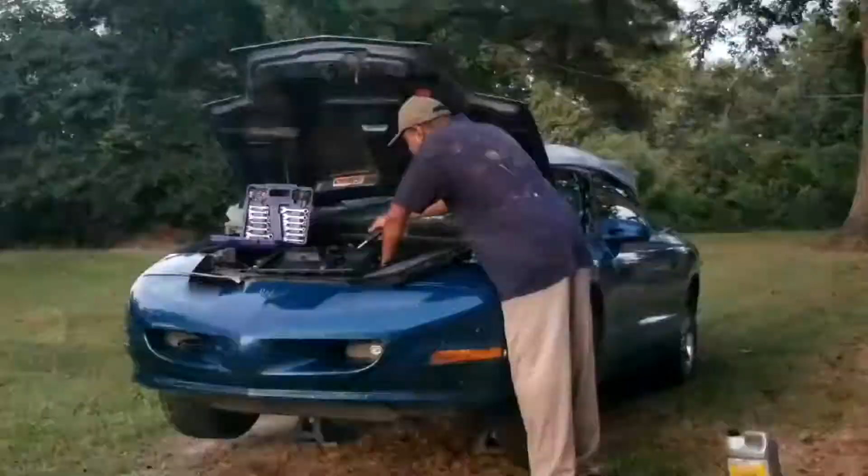Let the slow rebuild begin. Let's kick off this long process by removing the air box and the mass airflow sensor.

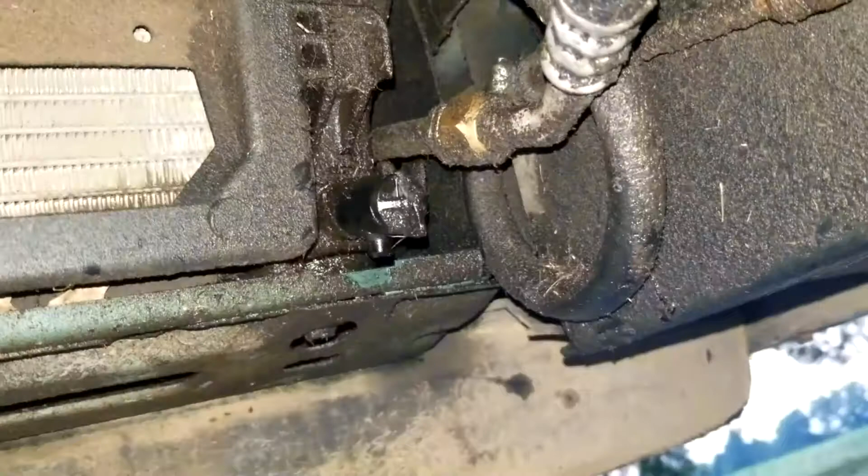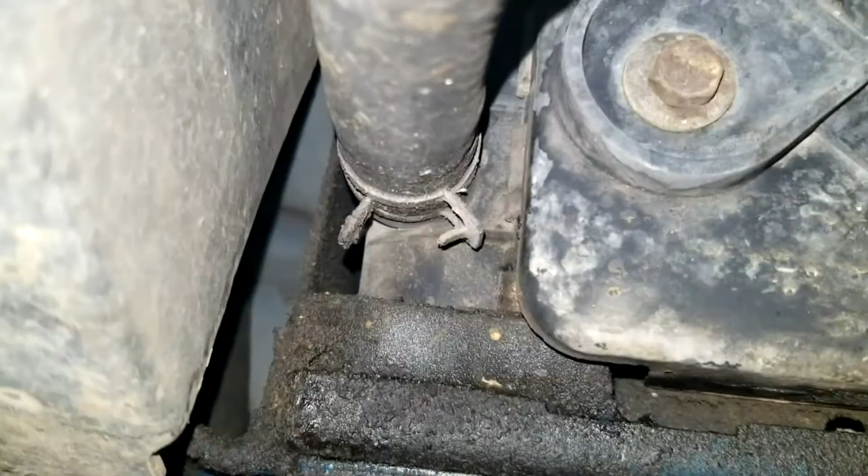Time to drain the radiator. Oh dang, it's broke. Okay, I broke this, so I'm gonna have to come over here to this side and see if I can take that hose off right here to drain this coolant out of the car.

Well, it worked. Decent amount covered. Got pretty much all the hoses off the pump. Took this off. So remove that out the way.

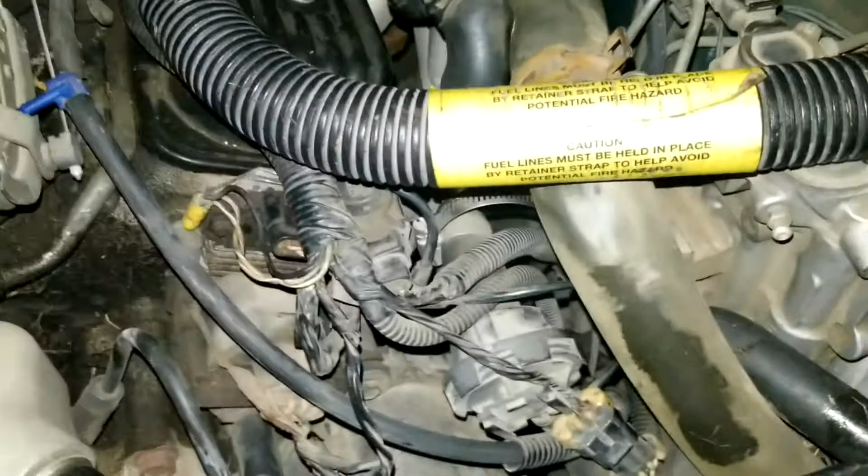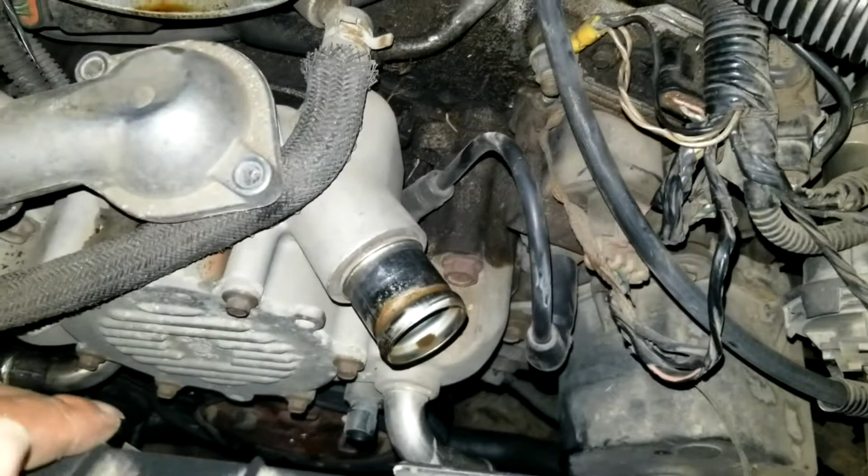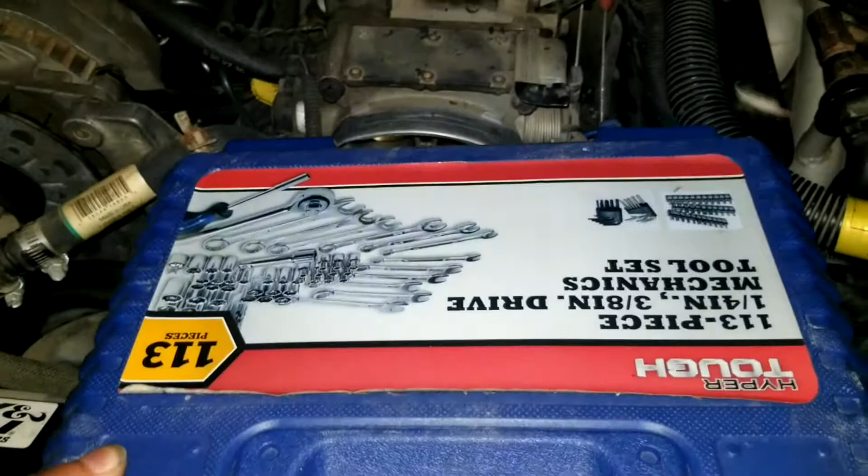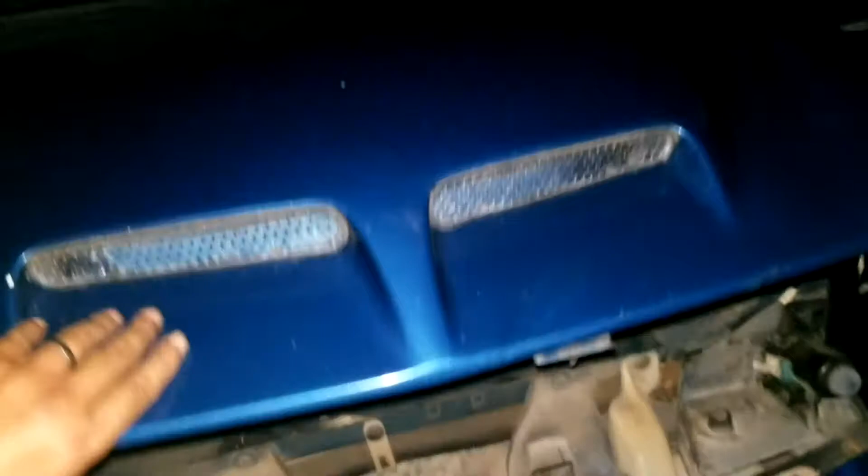So now the next thing I have to do, which adds more work to it, is I gotta take this coil off. And I think I got to remove that so I can get to one bolt out of these 6 bolts for the water pump. After that, I can knock the water pump off, and then we'll try to get the opti-spark. But for now, my day is done. Watch out for the next video to witness the disassembly of my opti-spark.

It's another morning, Saturday, September 14th. Gonna get back at it. I'm going for the coil right now. I've only taken one nut off so far, and I'm already running into problems.

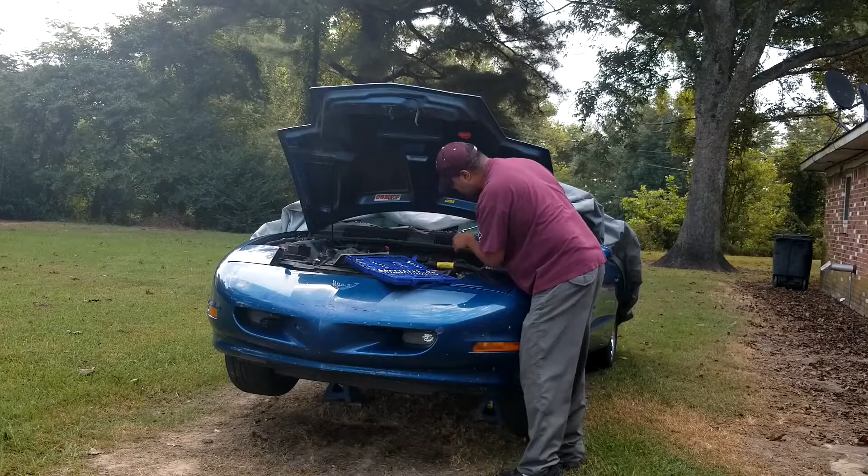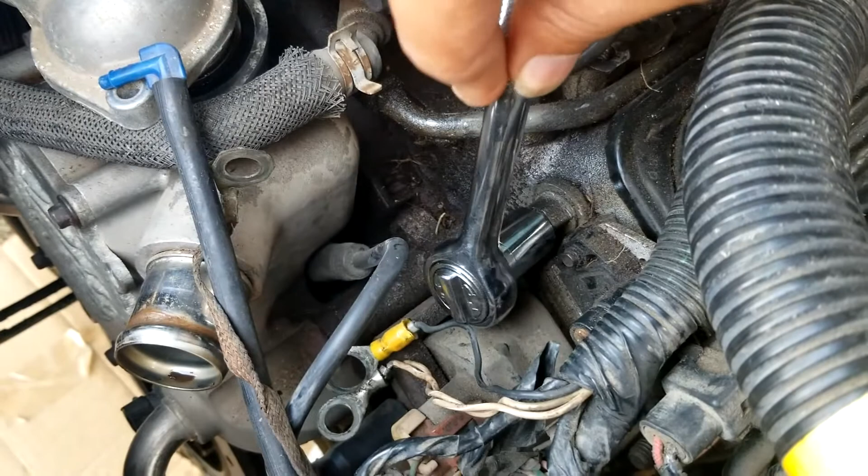Alright, the problem that I was running into first is that this socket is too short. I'm trying to put it on this bolt, it won't reach the bolt. So I had to go buy this long socket. It's just one, so I shouldn't have any problem getting it in and getting it off. So let's get to work.

With a touch of brute strength, I was able to remove the ignition coil. Put it on the lab coat again. I'm trying to operate. Remember how clean the lab coat is now.

Alright, just to show you what I'm working with. We got 2 bolts on top, 1 bolt on the bottom. So you got a bolt here, right here, and then one up under the bottom, which is easy to get to if you have your car on jacks. So let's go ahead and get this taken off, and we'll be done with that, hopefully.

Alright, after removing the air injection pump, remove these 2 bolts and the pump bracket that covers the water pump stud. Let's see if I can find this. I tell you what, I see the metal one. I can't see that one under. I probably have to get up under the car and see if I can find it.

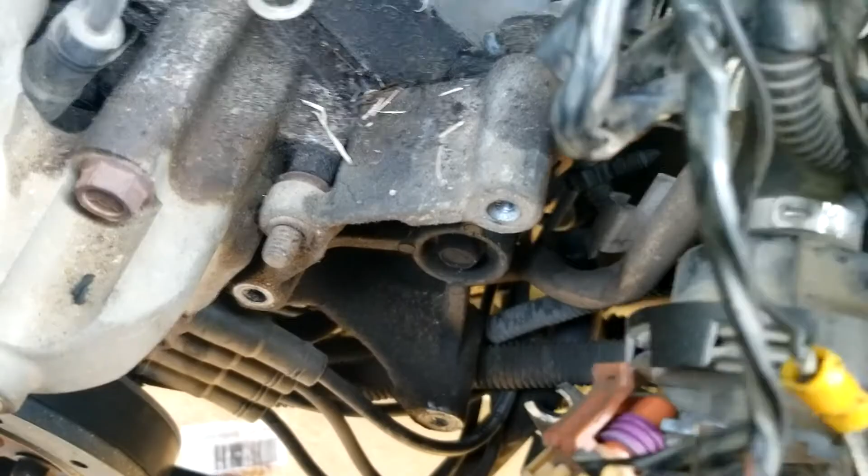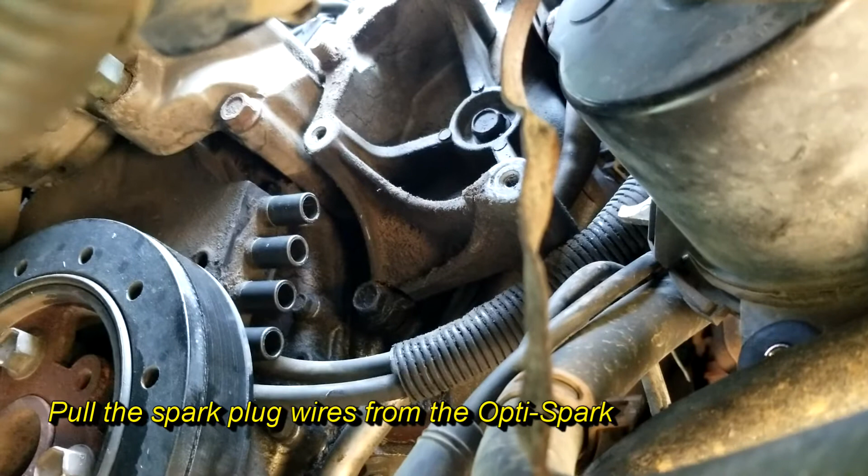Tell you what, we're working on this car rough. The second bolt, I had to pull the spark plug wires out to get to it. So you should be able to see it. It's right there. It looks like it's in between the second and the third spark plug housing.

The wires for the Opti-Spark - I already pulled the wires off. I labeled the wires, so I'm going to just go from top to bottom, 1, 2, 3, 4. And I actually put my marks on, so I know that's number 3, that's number 4, number 2, number 1. So we know 1 will go on top, 2 will go on the second one, 3 will go on the third, 4 will go on the bottom. That's how we'll do it.

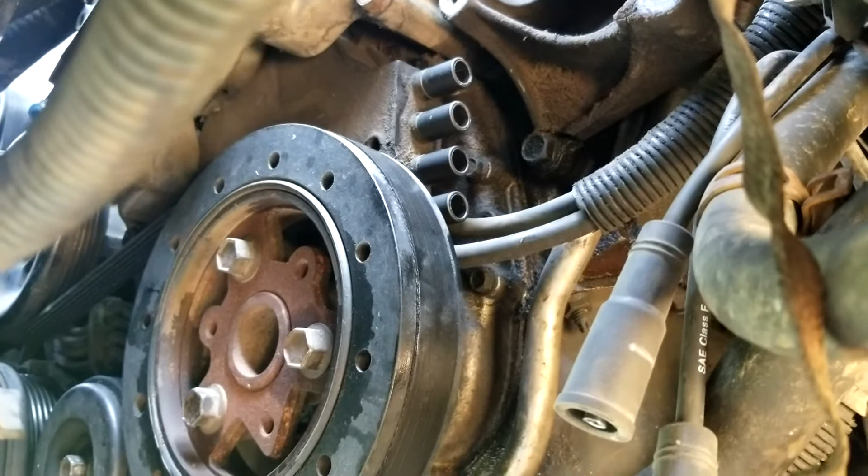And let me see if I can get this bolt off and get this bracket off, and we'll be ready to pull the pump. Unfortunately, that same bolt did not want to budge.

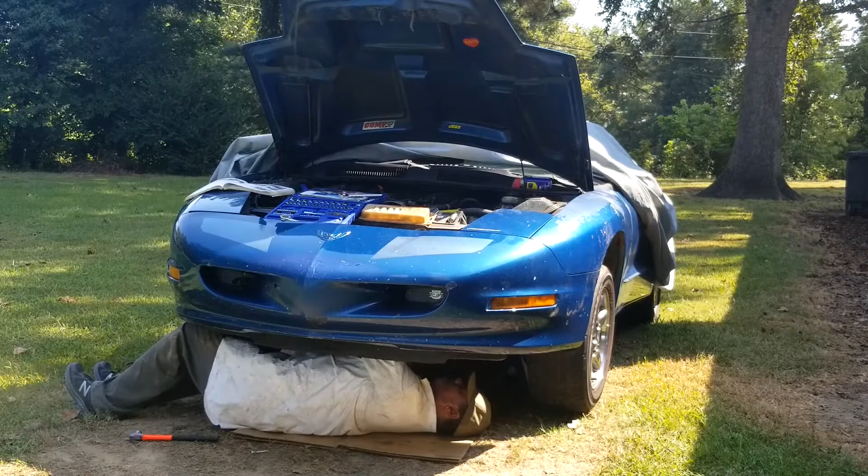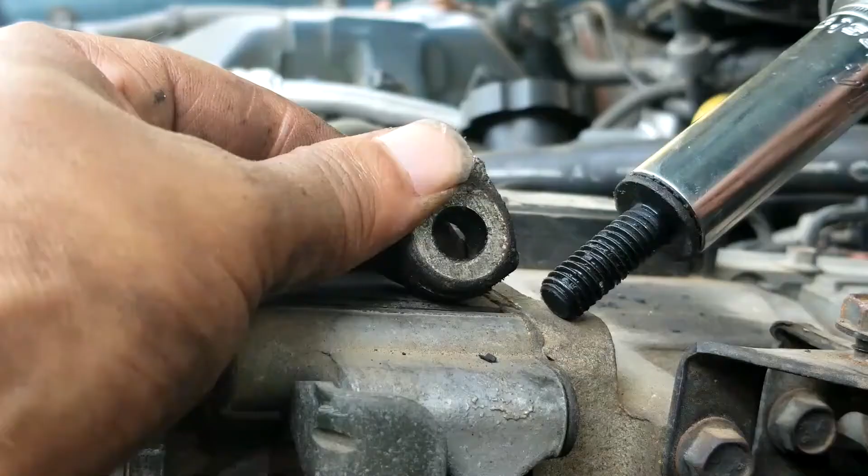Well, we got it, we finally got it loose. You got to be kidding me. I broke it. I actually broke the bracket. So y'all don't want to mess with me. There's the aftermath of what I thought was a successful removal of a bolt. I ended up breaking the bracket.

Will that make a difference? I don't know. This bracket's been broken already. It just doesn't seem like it's clean, but I don't know. But we're gonna see. All right, let's keep moving.

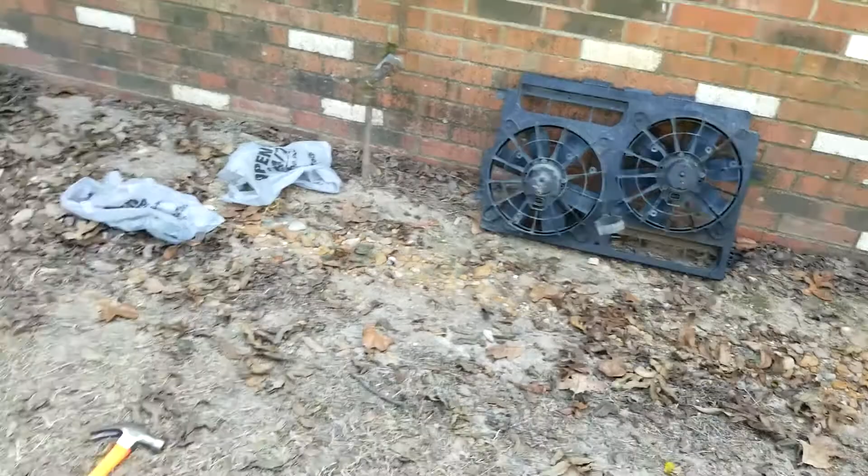Well, I ended up taking the cooling fans off too. It was actually getting in the way. But that gives me a lot of room, especially up under the car, to work on trying to get everything else taken care of. So let's get to work.

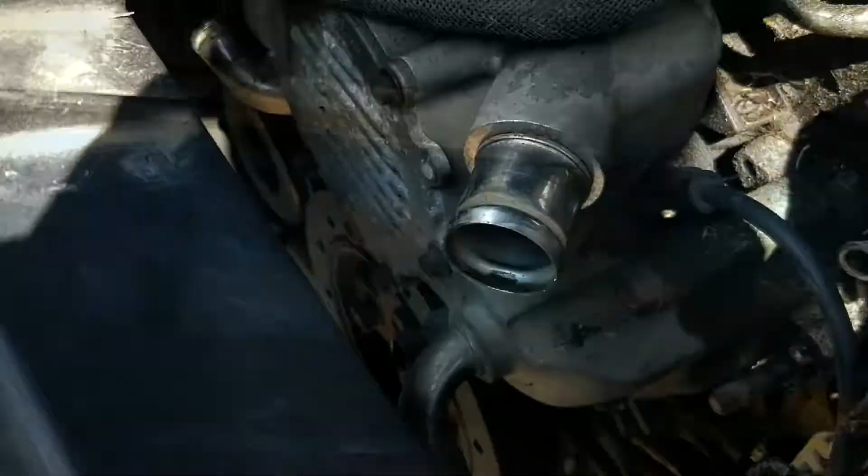Took the first 2 bolts off the water pump with no problem, but that third one, oh wow, it gave me a surprise. I found out quick that there was still some coolant in the water pump.

I was having issues getting the harmonic balancer bolts off, so I asked my son to help me. Okay, go for it. Oh! Dude, why? He almost dropped that heavy breaker bar on my face. All right dude, appreciate it. Thank you. Kill me, but thank you.

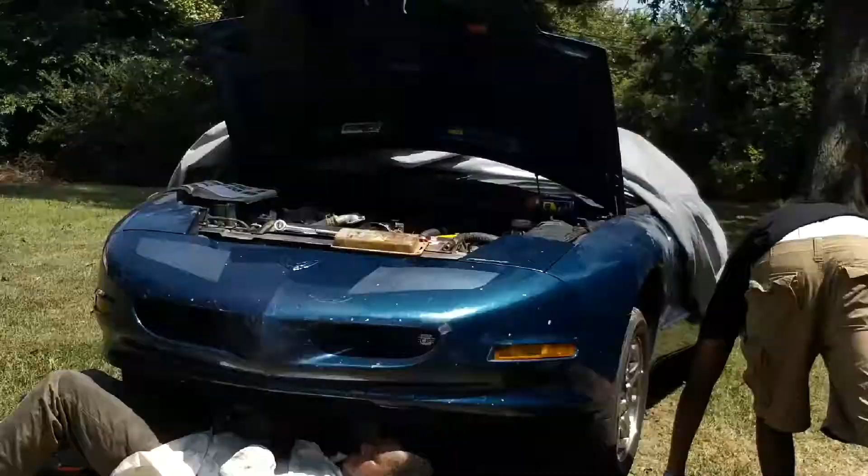The problem I ran into right here was I was turning the harmonic balancer and trying to loosen the bolts. So I actually had to get my son - while he tried to loosen them, I tried to hold pressure on it, and we were able to get them loosened. So we're good to go.

We're almost to the opti-spark now. But first, with a little persuasion, let's pull the water pump. All right, we got it. Water pump finally out. Next is opti-spark. And about 30 minutes later, I had the opti-spark in hand.

To all of the mechanics, auto mechanics out in the world, my hat's off to you. To anyone who's working out in this heat, 97 degrees right now - road construction workers, military personnel, anyone, civilians, people just getting the infrastructure back correctly - my hat's off to you. Farmers out in the field, people in hot factories right now, my hat's off to you. I appreciate each and every one of you. You guys take care, and as always, be blessed. Peace.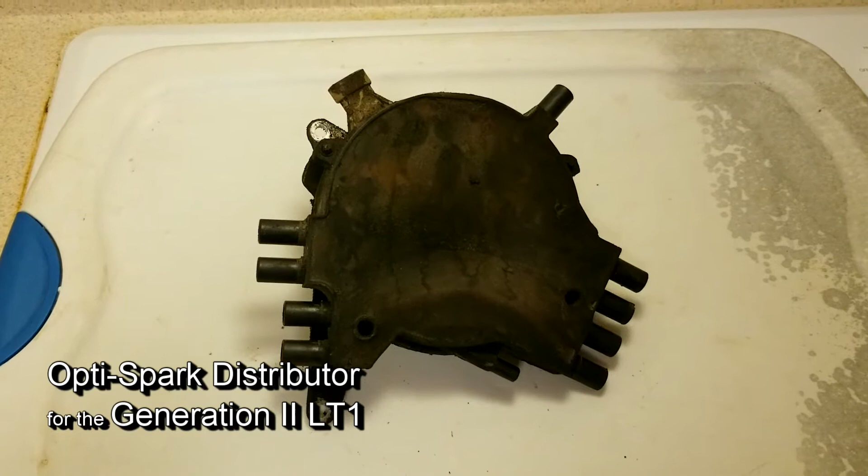This is the opti-spark from the Gen 2 LT1 engine. I'm going to take it apart, and what I find on the inside will let me know whether to continue with this repair, or if the Firebird Travels Facebook page will eventually be a legacy page. Stay tuned.

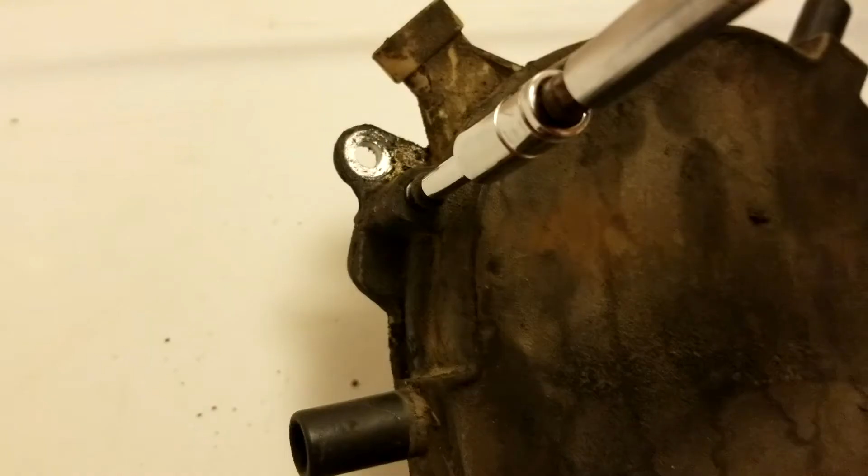I have 4 Torx screws that I have to remove. I removed the 4 screws and... okay, so I just pulled this off. And to my surprise, I have 2 little screws right here.

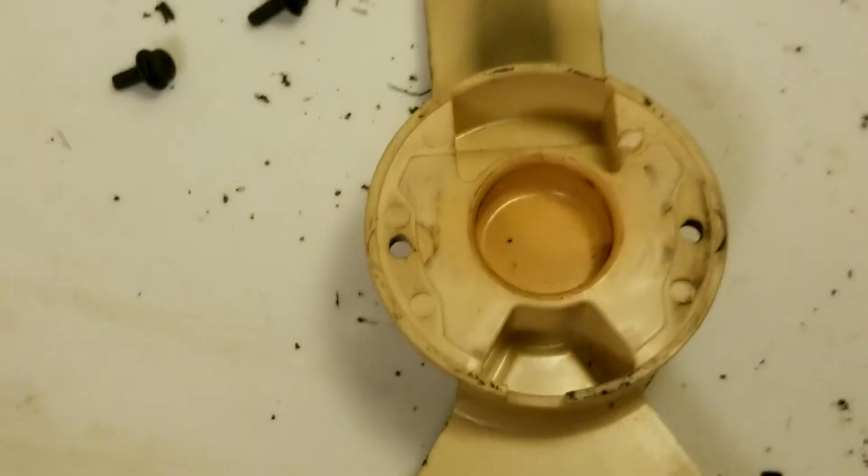I don't know, babe, apparently they go to the rotor. So apparently, yeah, my rotor is bad. Upon closer inspection, seems like a piece - let's see if I can point to it right there. That piece broke off into it.

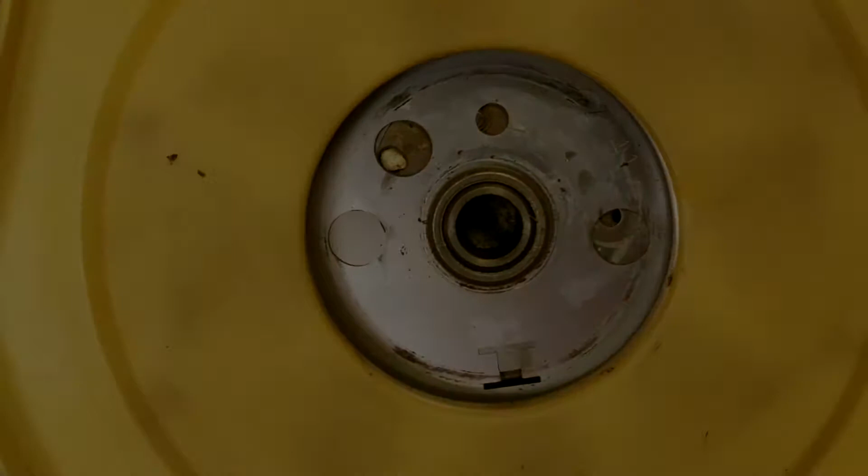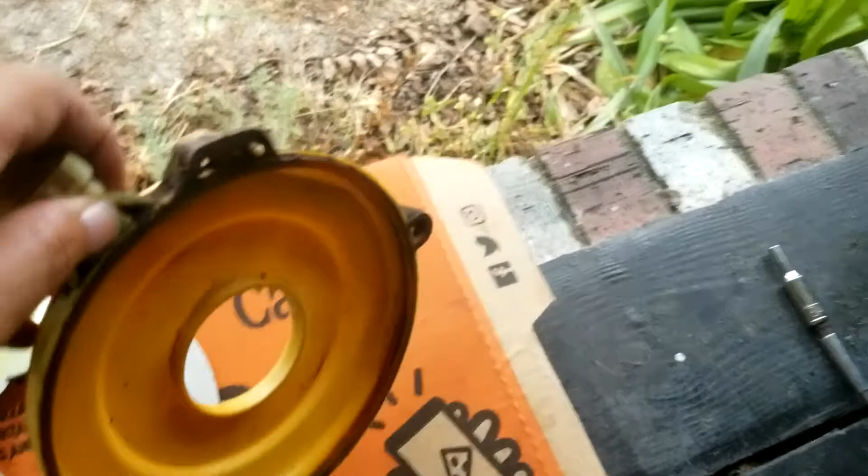And I already caught myself trying to clean this stuff up. One thing I did notice, especially with this, there was a lot of little buildup here, right up in there, and I already cleaned it. And this steel plate has oil all on it, and there was a little oil down here, kind of close to where my vent hole is. Didn't really see anything bad with the sensor.

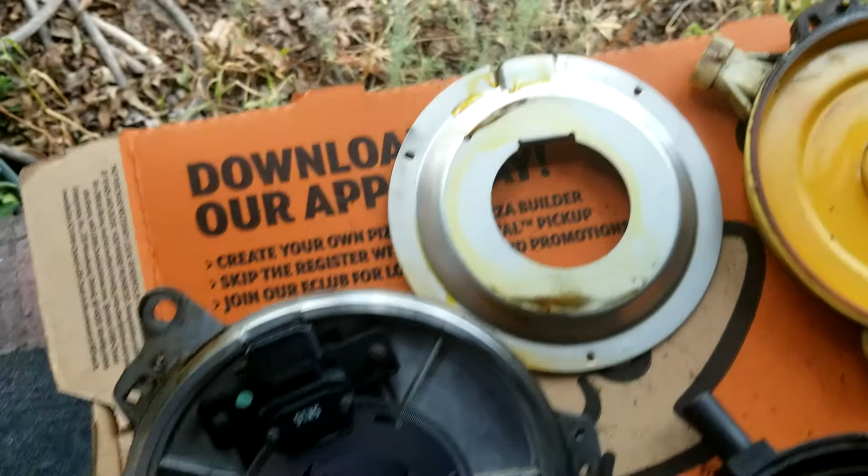Of course, they say the sensor is a Mitsubishi sensor, and apparently it's one of the best ones. So if my sensor is okay, which I believe it is, even though there's some oil on this steel plate, there really wasn't anything here, and I really didn't see anything on the pins. So if I can get this rotor to stay on, and I'll try to clean these points too, I think I'm gonna take a gamble. Might as well save some money while I do it.

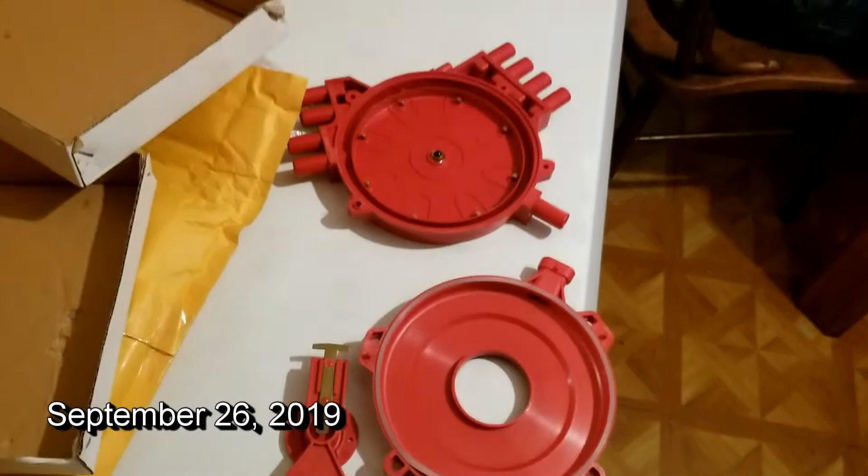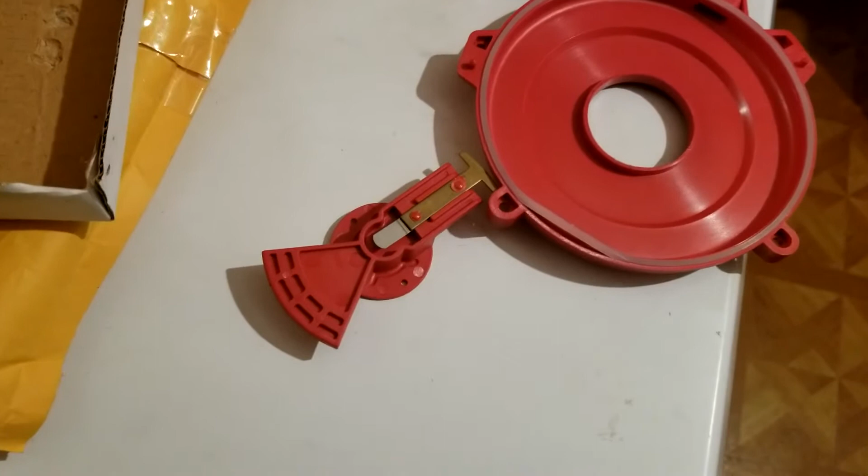My new cap and rotor finally came in, and I was kind of tempted to use the cap as well, but I was looking at the rotor and I saw how loose the seal is. So I was looking at the cover - I think all I'm going to do is just use this rotor, because I know that seal on mine is not bad at all. It's not great, but it's not bad. And I think my cap is in decent condition too, so we'll just try to keep it as original as we can.

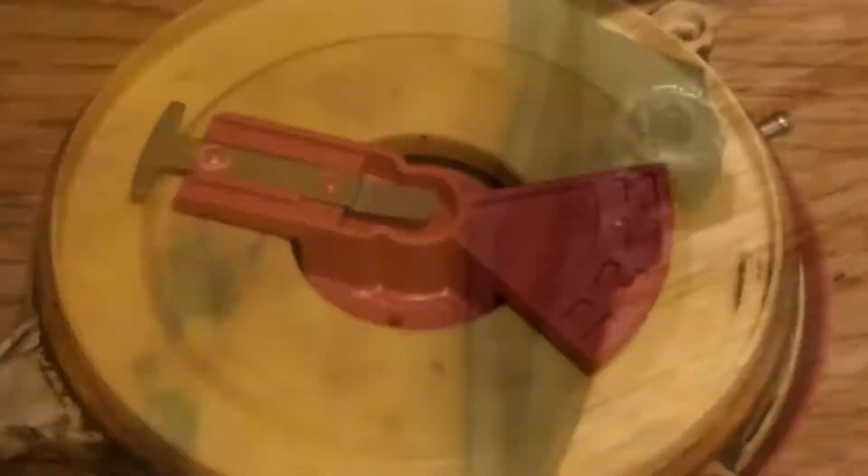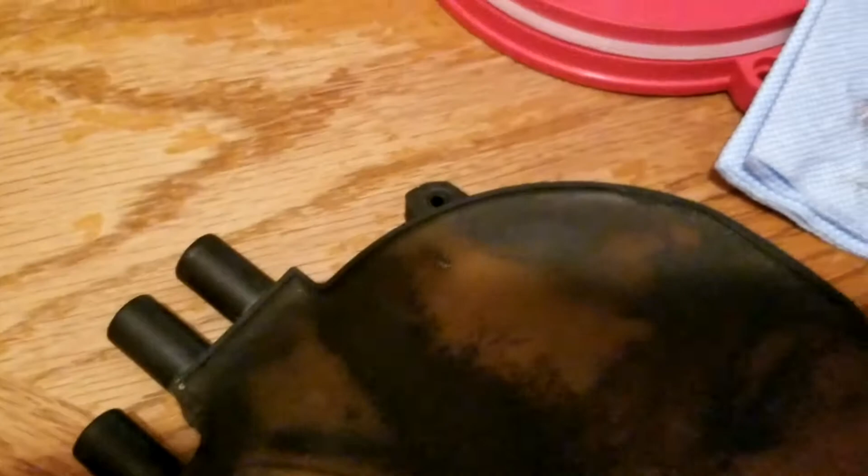Alright, let me go get some thread locker and get these screws loctited in. Well, doggone, He-Man, over-tightened the bolts again and broke something else. I'll tell you what - so now I have no choice, I gotta go with the red.

So this is how it's supposed to look. And I set up there and I guess I over-tightened it and broke these. I mean it just crumbled on me. So here we go.

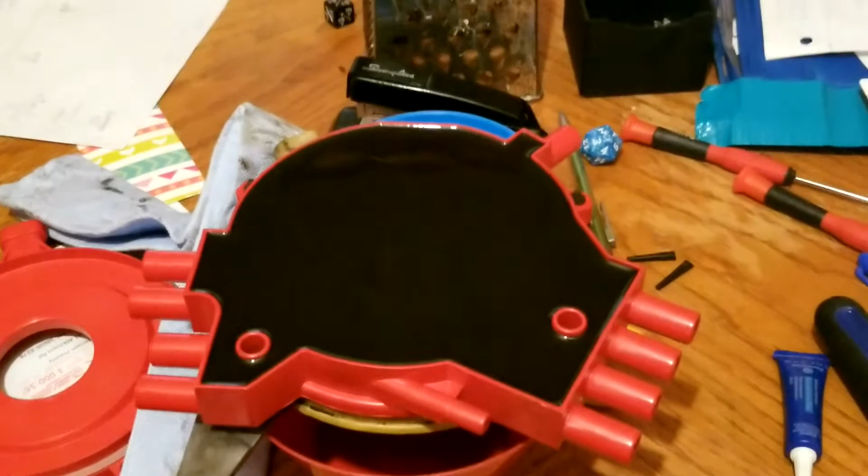Nice and red and shiny. All right, let's go ahead and get up under here. At least let's get the opti-spark on.

Okay, now look at me. I have the pin-driven opti-spark, so I don't have to worry about lining up the splines. So hopefully it won't be as bad on this one. We're about to find out.

Down in there. But I tell you what, it actually looks good.

Everything's about ready to go for the water pump now. Once I start, I have to clean this other stuff off and then get my gaskets ready and get ready to take care of that.

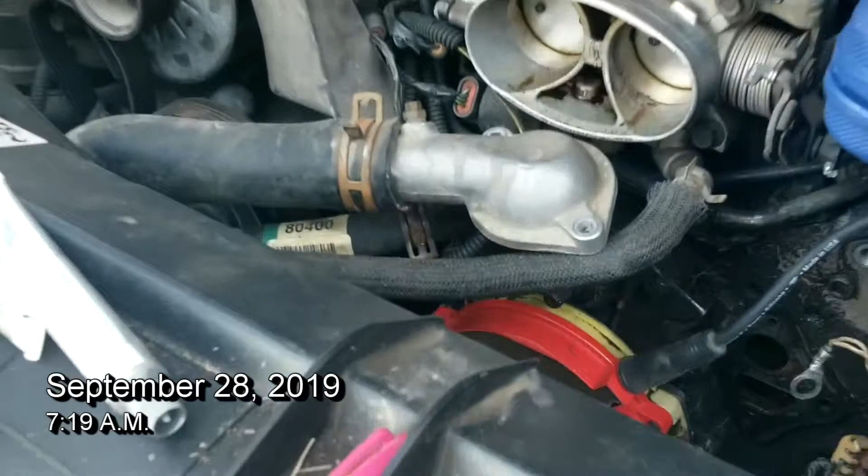The spark is done. Up at the crack of dawn to hopefully get this engine bay cleaned up and get the water pump put back on and everything buttoned up together, and hopefully by this afternoon we'll be back on the road.

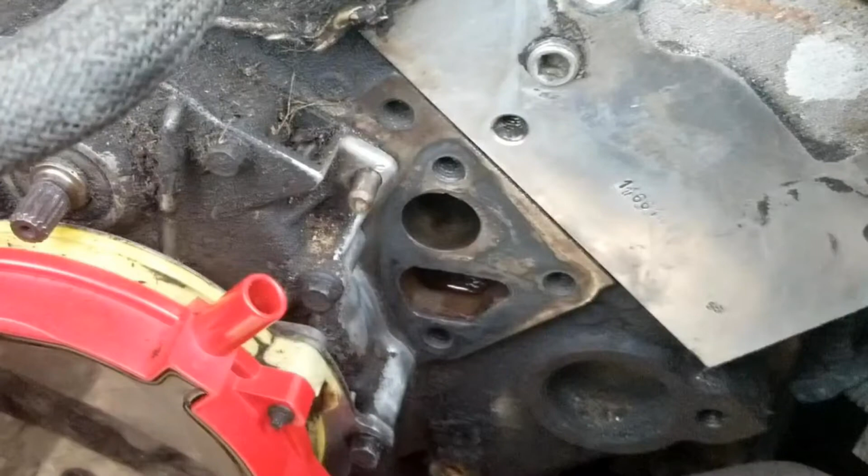It started off like this, but I got it like this. I spent almost an hour cleaning up these gasket areas here. You definitely don't want to go skimpy on making sure that your prep work is good.

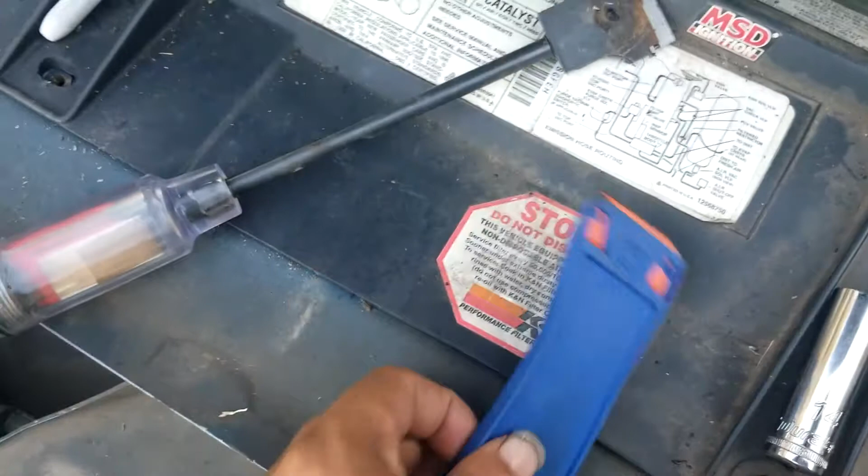We're about ready to mount the water pump. We bought this safer scraper. It's supposed to have a plastic blade that I started using on it. It will not get all of the gasket off. You will have to use a proper scraper with a proper razor blade.

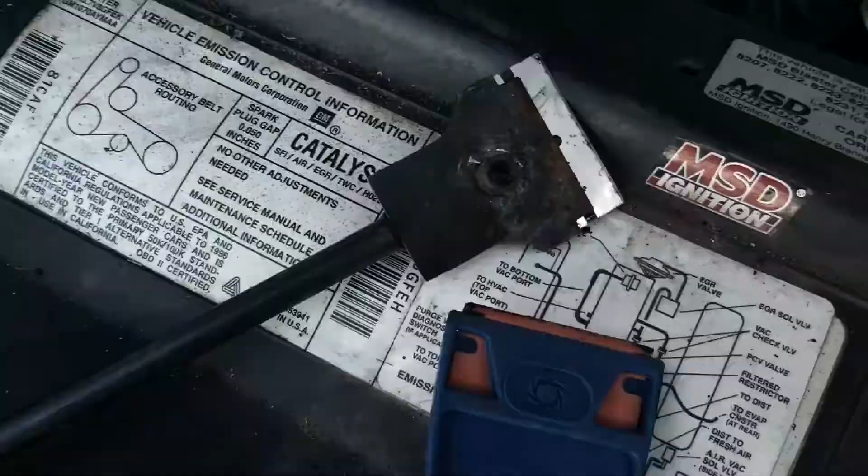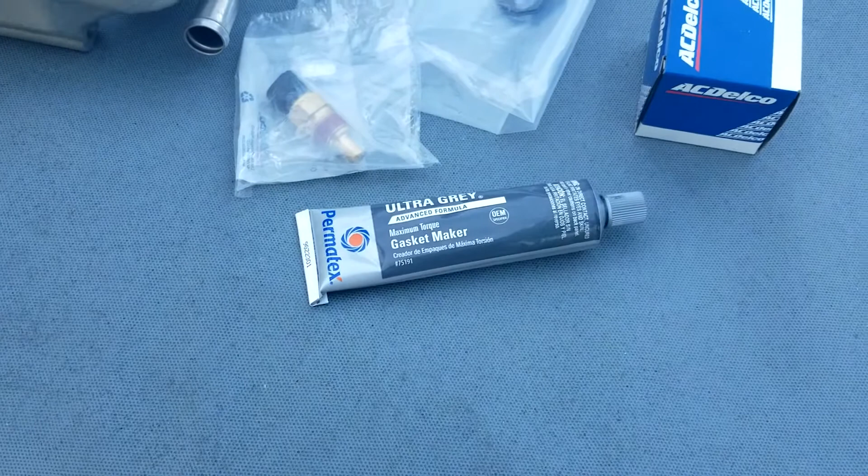I have right here my brand new water pump with gaskets. I also had to buy a coolant temp sensor. I had to, because I actually broke the other one when I was removing my old pump, so I had to get another one. And I have the thermostat. I also have my gasket sealer, and we're about to get ready to get it ready to put it on.

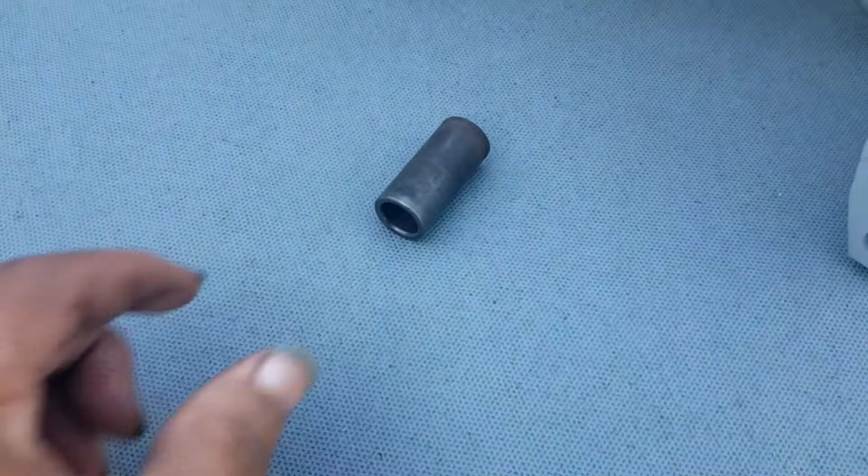Okay, one thing to make sure, make sure that you have your coupler. It was stuck on the back of my old pump. So just make sure that you remove this and place it on the new pump.

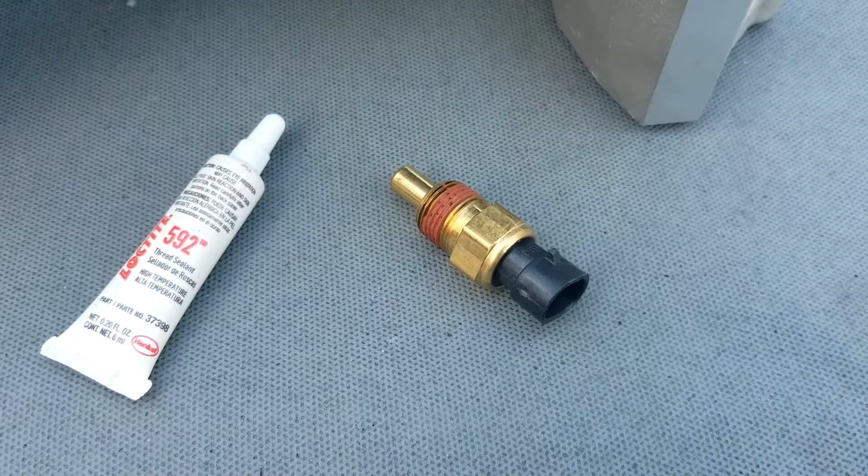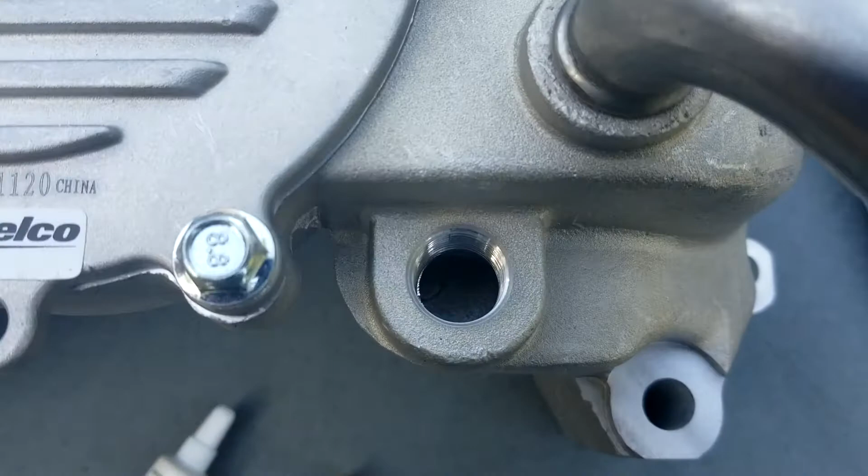Apparently the coolant temp sensor has some kind of red seal on it now. I'm still going to make sure that I'm good. I'm going to go ahead and put this Loctite on, and then we'll thread it into that hole right there, and that'll be ready to go.

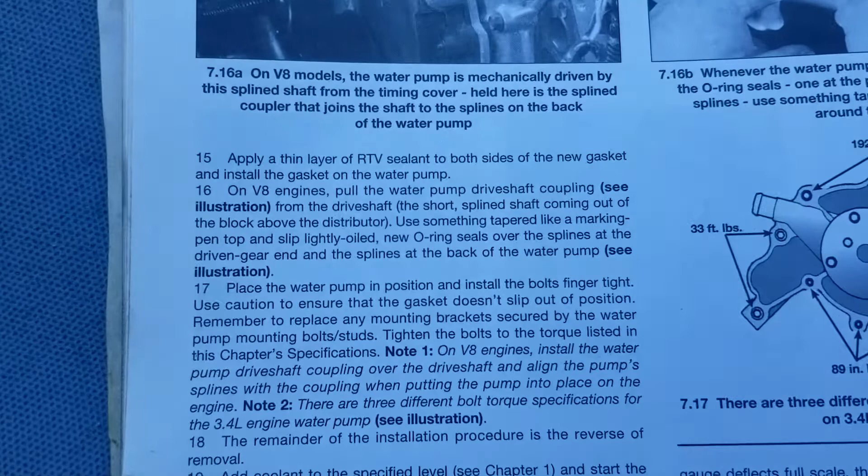Nice little makeshift workstation right here. Let's get it done. Alright, according to Haynes, I need to apply a thin layer of RTV sealant to both sides of my gasket and install the gasket on the water pump.

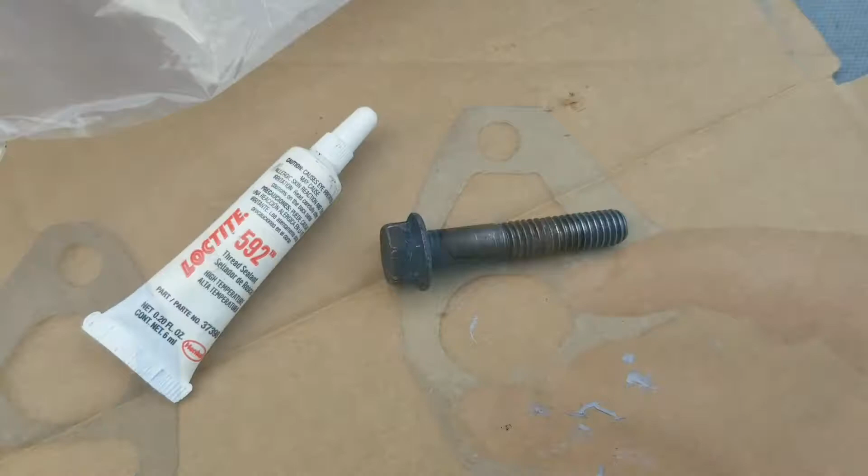Definitely want to make sure that you put this Loctite, this thread sealant here, the 592, on each of your bolts. This one I know goes in the water jacket of the water pump, so we definitely want to make sure that you have thread sealant on this, the 592.

Congratulations, Mr. Presley, you just installed your first water pump on an LT1 engine. Yeah. All right, let me put this thermostat on.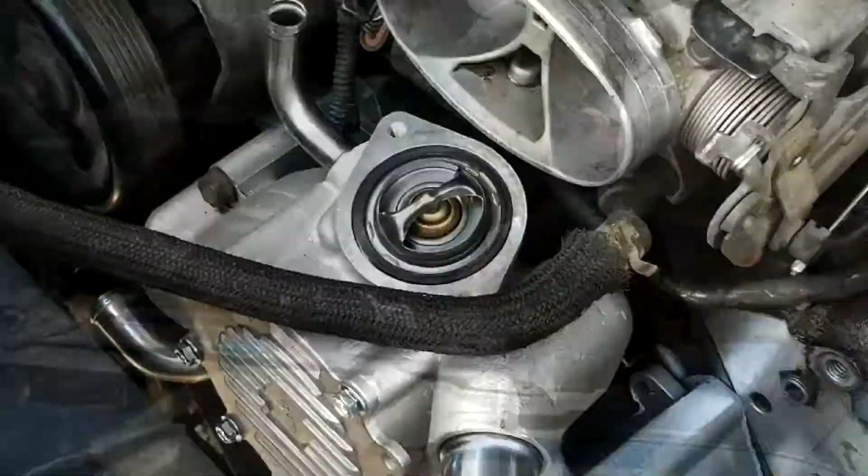All right, we are almost there. She's coming back together slowly but surely with the air injection pump, the harmonic balancer, and the cooling fan. Might be a good sign. Doggone wind blew the cover off the cup. Let's button up the mass airflow sensor and the air box.

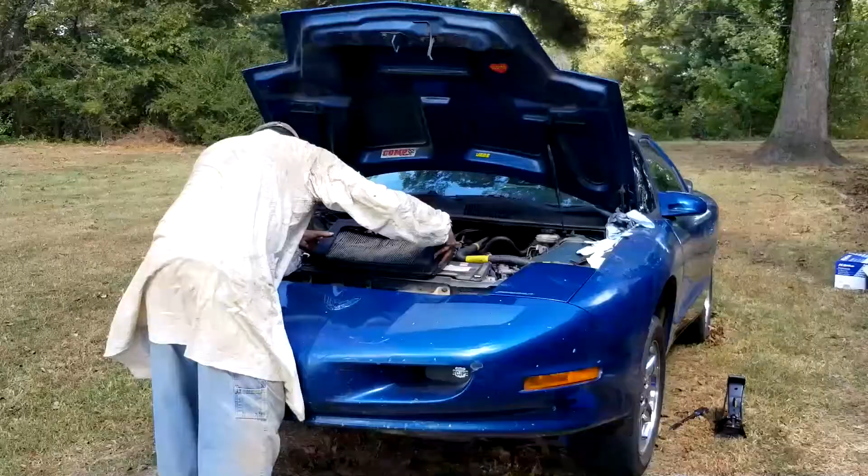I'll tell you one little thing, I ain't never doing this again. At this point, I was burnt up tired, but it's almost over. Let's fill up the radiator with some coolant and get it off these jack stands it's been sitting on for over two weeks. It's almost about that time to see if all that hard work paid off.

All right, look at that opti-spark. Got that nice shiny pump under there. Hopefully that'll take care of the leaks. Hopefully that'll take care of my situation. Hopefully I will never have to do this again. I really don't plan on it.